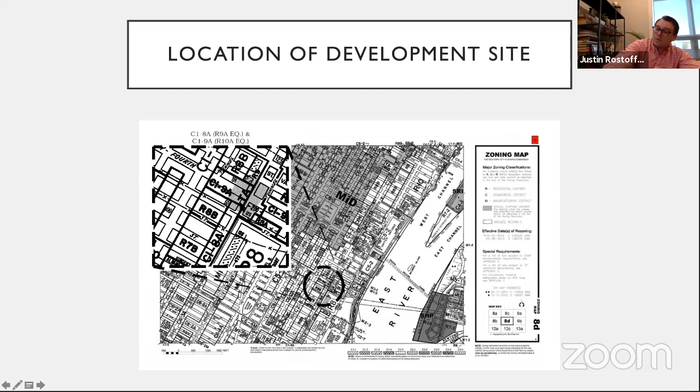As you can see here from the zoning map, 8D in New York City, our development site is located right in this shaded area, which is the Special Transit Land Use District. More specifically, our development site spans 4 tax lots on 2nd Avenue between East 33rd and East 34th. It is tax lots 29, 30, 31, and 32, all within that shaded special district.

This is a depiction of the site today, as you all may recognize. The 4 tax lots are vacant land, ready to be developed, and perfect to have a design for the subway entrance as you all raised in September. So this lot frontage equates to these 4 lots right here.

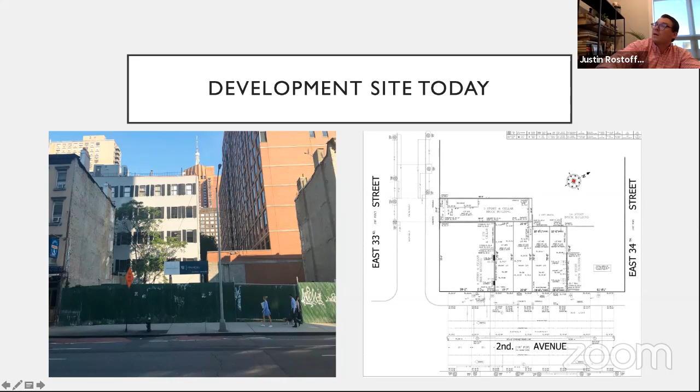In September, when we originally came, we proposed a development design of a mixed-use 7-story building. On the ground floor, we originally had roughly 50% retail space. This would be the southern portion of our lot, closest to 33rd Street. And then another 50% of the ground floor space was a lobby to the residential condominiums right above.

After we met with you in September and heard your desire and suggestions for a subway entrance, working with MTA, we have come up with a new design, which we think is appropriate to what you have suggested in your feedback.

And this is our new design. As you can see, we still have a 7-story mixed-use building. However, on the first floor, for roughly 28 feet, there's going to be a subway entrance right at sidewalk level. Here, there's going to be an elevator pit leading down to the 2nd Avenue subway station and platform, accessible by sidewalk traffic and pedestrians. The first floor residential lobby will stay. And then in between the subway entrance and the first floor residential lobby will be just a smaller retail space.

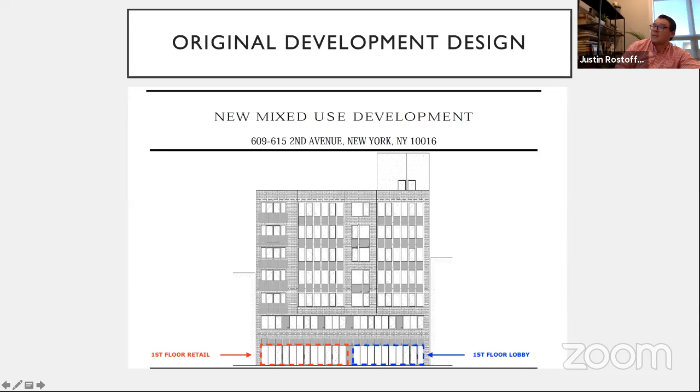If we look at them together to see where we were and where we have come, the original design was just a first floor retail and first floor residential lobby, as opposed to now we have the subway entrance, easily accessible for all patrons, incorporating still a ground floor retail, ground floor residential lobby.

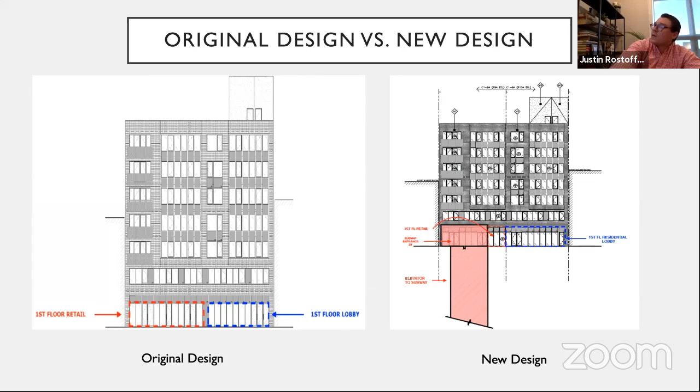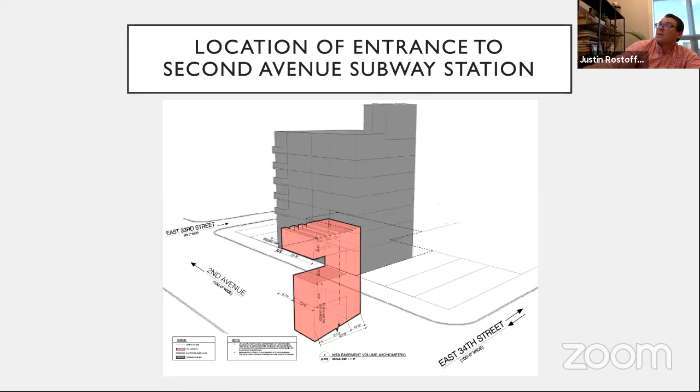we have only come here due to the insight and the feedback of this Community Board 6. And we'd like to thank you and every one of your members and members of the public who have contributed thus far. Please ask us any questions you may have, and myself, David, or Brian are happy to answer.

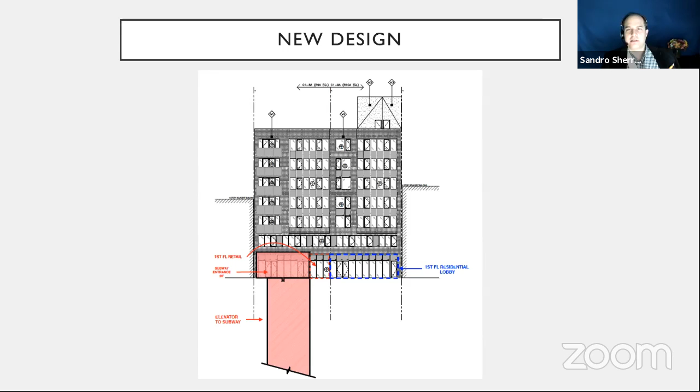Go ahead, Ann. So my question is about escalators versus elevators. Elevators just break down all the time, and I don't really know how deep this space is. I know you can do a pretty sharp rake of an escalator, and I'm curious whether that was an option considered. I think about the escalator at 42nd Street that goes directly from street level to just above the 7 platform, and I doubt that's deeper than this one is going to be. And, you know, it's a concern, as elevators break down all the time and don't have the carrying capacity.

I see you rolling your eyes, Sandro. No, you're absolutely right, no, thank you. Okay, can I respond to that?

Sure. Hi, we tried to look into the escalator, but don't forget that the MTA is taking the escalator and putting it on 34th Street. This elevator is more to act for the ADA that they need to bring. The escalator is not something that can be used by the ADA, and that's where they were thinking more about the elevator for the ADA.

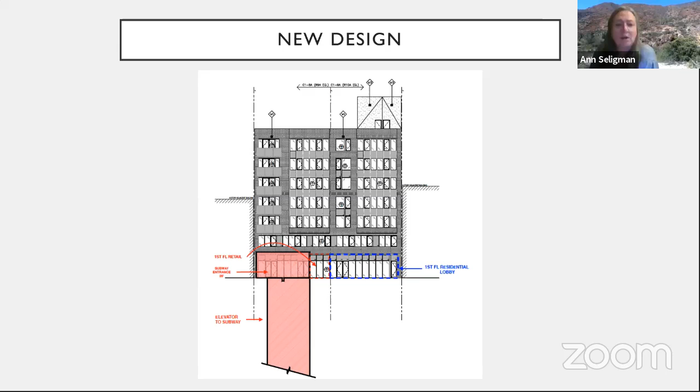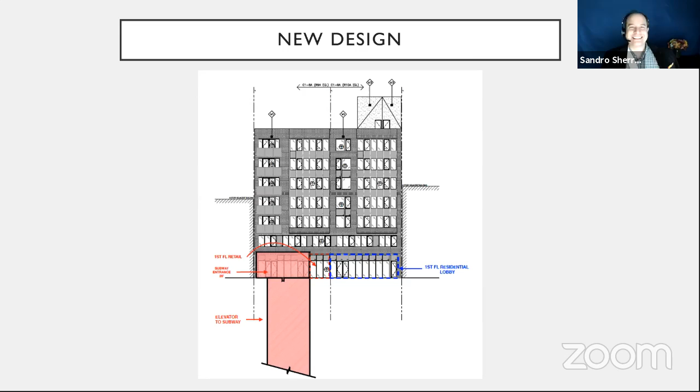So there'll be an escalator across the street, basically? Not across the street, on the same street, if you look at the west side, southwest corner of 34th Street, where the Clover Deli is, I believe. Oh, so just down the block. Yeah, great, that answers the question.

If you look at the design from years and years ago that was designed for the MTA, it was always the intent to take that corner lot and use it as the entrance for the subway and to have the elevator across the street. Now I think they moved the elevator into our building and maybe used across the street for something else, but they kept the option to have the elevator in our building and have the easement there. Thank you.

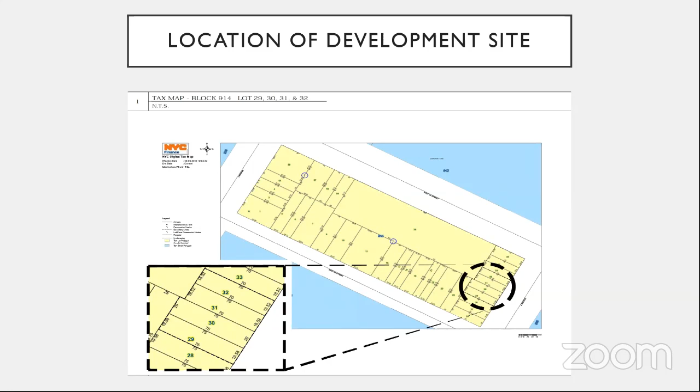I think if we get, Justin, if you can try to show what the MTA study is. On the MTA study, you can see exactly on each corner what they were planning to do. I don't know if you can do it. I can, I'm going to have to stop sharing my screen and then I can get it. Is my screen off? Because then I will go on. Yep, yeah, it is, okay.

While we're waiting, I can say that the MTA worked very close with us. They understood it was a small mistake by them approving before the community board, and they really helped us a lot by expediting the process. Instead of taking a year and a half, they went through the engineering and helped us with the timing, and they did a good job with that.

They responded with a drawing 2-3 days after we gave them our drawing, because it was back and forth. We had to move columns, move space in our building to accommodate what they needed. It took a long time between our engineers and their engineers, but to give them credit, they came back every time in a short period to give us the answer on what we need to do next.

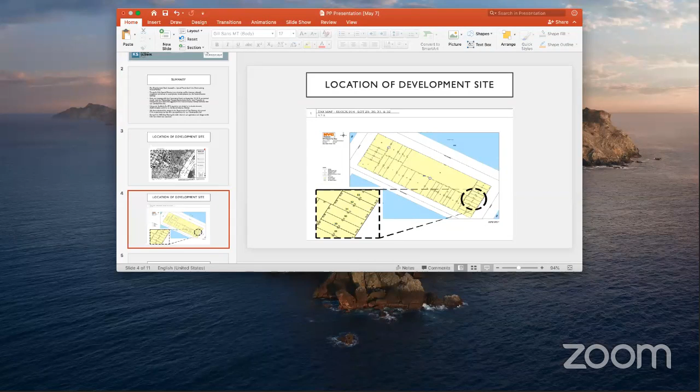Since there's this recessed area, will you or the transit authority be responsible for policing it? The MTA will be responsible for anything to do with that space. Responsibility goes to the transportation authority in terms of upkeep, maintenance, and all overhead and operation, once this becomes a subway entrance—once they execute their right to make this a subway entrance.

Okay, so as you can see here, this is where—okay, I understand. So if somebody spills a bottle of water and it's below freezing and it becomes icy, it's their liability.

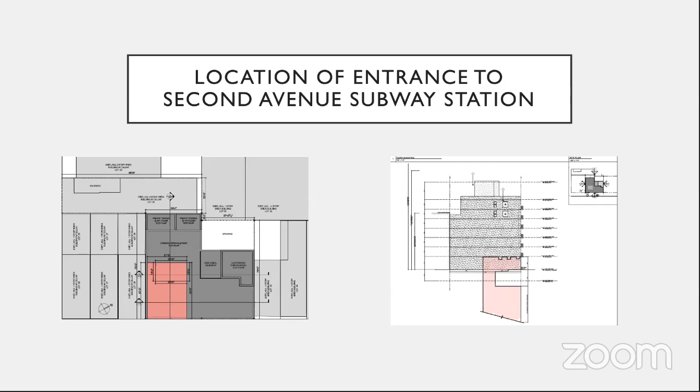Correct. Now, I would like to show the study. Sure, please. Thank you.

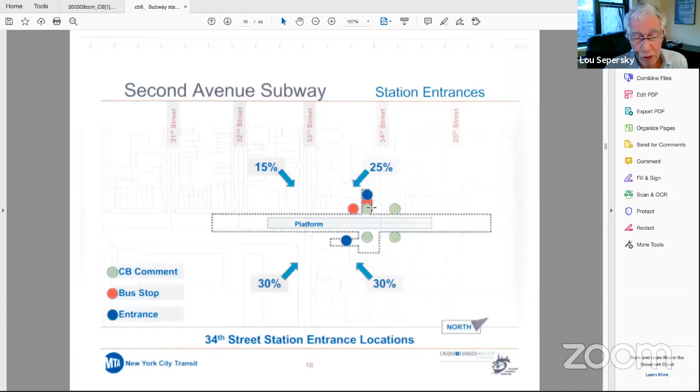That's a question. No, this subway entrance on the development site we are proposing here is only going to have 2 ADA compliant elevators. Right, but I'm asking about the corner, the street access corner, because somebody was talking about an escalator, and I wanted to find out whether it's servicing the same platform, but not from your property. We haven't worked directly on that, but to our understanding, there will be an escalator on 34th accessing the platform.

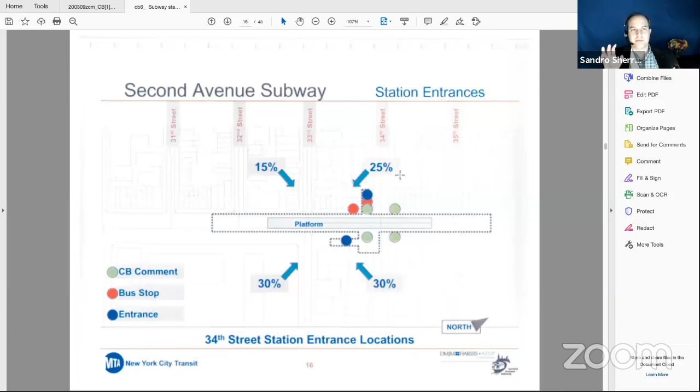On the southwest corner. Okay, that's fair enough, that covers the ground I was trying to cover. Okay, thank you, Lou. So it sounds like there's some questions around the MTA application, not so much the application of the actual station, not so much this application before us. So I'm just going to move on. Thank you, Lou. So Kathleen, you can unmute yourself and ask your question. And then I'm just going to remind everyone, we are not taking any substantive questions through chat.

Please raise your hand if you have a question about procedure or a question for our speakers. Thank you. Kathleen? Yeah, my question is that it doesn't kind of match the rest of the subway line that's already in existence for Second Avenue. Just that if it is approved, it doesn't look like it was based on the foot traffic or the importance that it would hold, because it's like a transit hub, with the development that's gone on 34th Street already, not even saying moving forward the next 20, 30 years.

So it looks like to only have it, it almost looks like you'd have to say you lose your retail space in the bottom. You'd get a taller building to make up for loss of retail space, but you'd have to have more elevators than just 2.

This subway entrance with the elevators is planned at the moment to be complementary to the planned additional entryways that have been previously planned for this area. So, to our understanding and working with the Transportation Authority, this is why it hasn't been previously listed - this is to add on to available access, not to substitute.

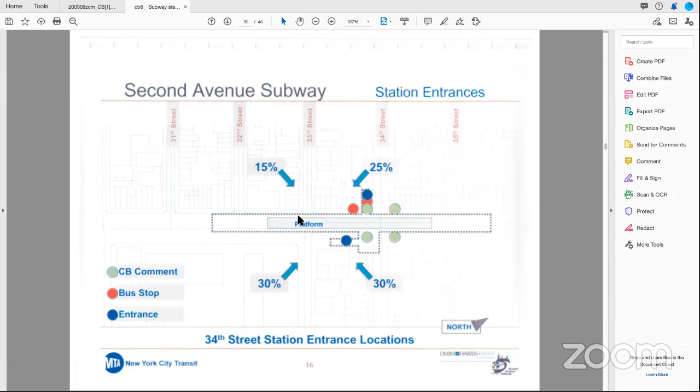I really don't get involved in the MTA studies exactly, so don't take my word. I think they were planning originally for 2 elevators on the southwest corner, but I don't want to say something I'm not 100% sure of. There are a few studies on the table, and I don't want to speak in the MTA's words, but they did a few studies, and those studies are a little bit old. I'm sure when they come to do the new subway train, they'll do another study. And the same way they took the easement from us, any new development in the area, they will take the easement and use it for the MTA.

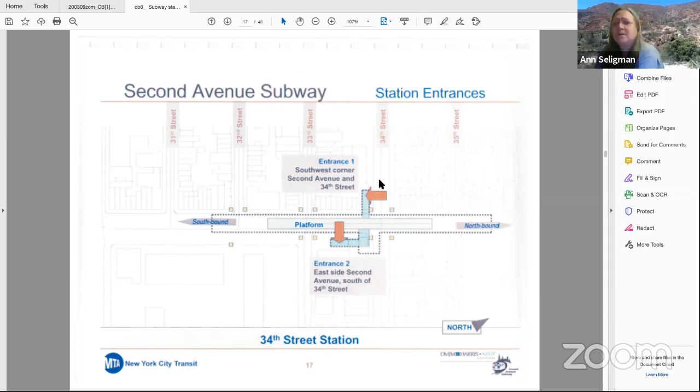Do you want to make a motion? I would make a motion that we do a resolution of no objection, but include in it some of the issues, subject to the questions, that we'd like the MTA to make note of the issues raised here, something like that. Okay, if anyone raises their hand, I'll take that as a second. You have to raise your hand. Lou, it looks like you raised your hand. Yep, okay, I got it.

That's one tiny additional comment, if I may. Go ahead. This neighborhood is in the process of radical change, and we, as a board, proposed the criteria for the 34th Street station a very substantial number of years ago. This issue came back to us a couple of years ago, and we reiterated our position about the necessity of a subway platform. I think we've approached what we were attempting to accomplish at the time, and this resolution, as we're starting to shape it, is probably a good way to go. Okay, thank you.

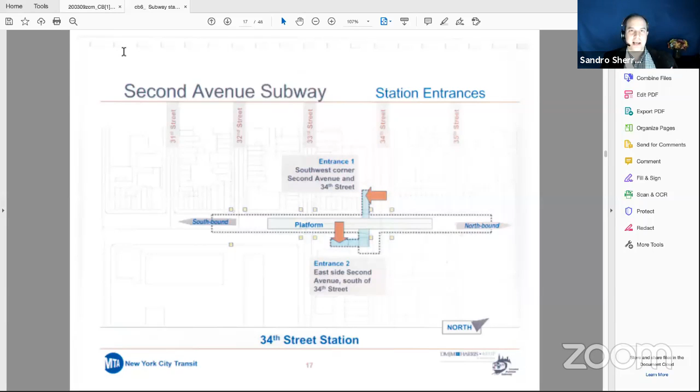Thank you very much. Let's go ahead and vote. We will take this vote via roll call. We're voting on a motion of no objection for 609 Second Avenue. I don't have before me the two land use numbers, but we'll add that to the resolution. When your name is called for a vote, please unmute yourself and say aye, nay, abstain, or abstain for cause.

I'm going to ask that our district manager please read out the roll. Jim Collins. Aye. Adam Harkey. Aye. Kathleen Kelly. Nay. Kavitha Matthew, can you repeat yourself? Aye. Okay, thank you. Sandra McKee. Aye.

Wells Magali. Wells was having some issues, she may not have been able to rejoin us. Okay, so we'll skip her.

Jean Santoro. Jean? Jean, you unmuted but we didn't actually hear you, can you try one more time? Or raise your hand? Yeah, there we go. Okay good, thank you. Yes, I'm for. Larry Shire. Aye.

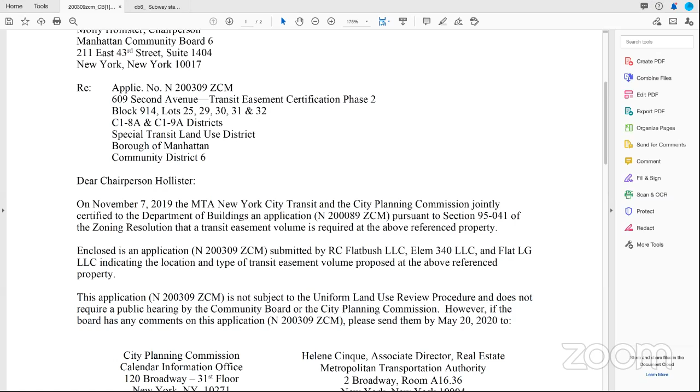Ann Seligman. Aye. Lou Sapersky. Aye. Sandro Sherrod. Aye. Letty Simon. Aye. Kathy Thompson. Aye. This motion carries 11 for, 1 against, no abstentions, no for cause.